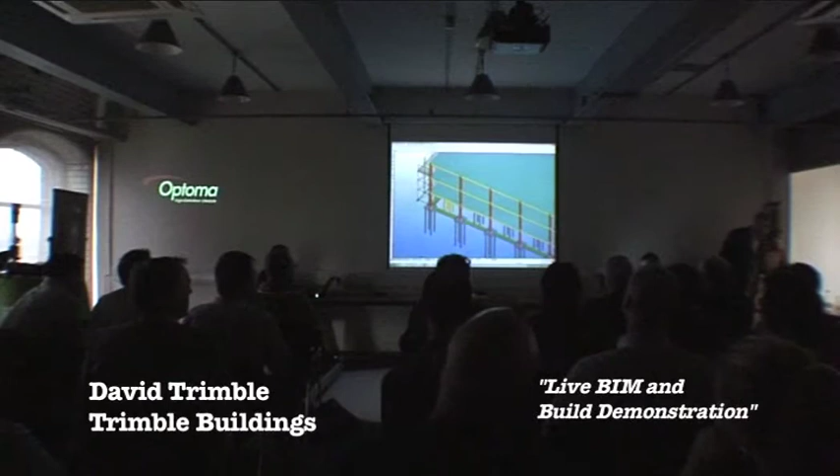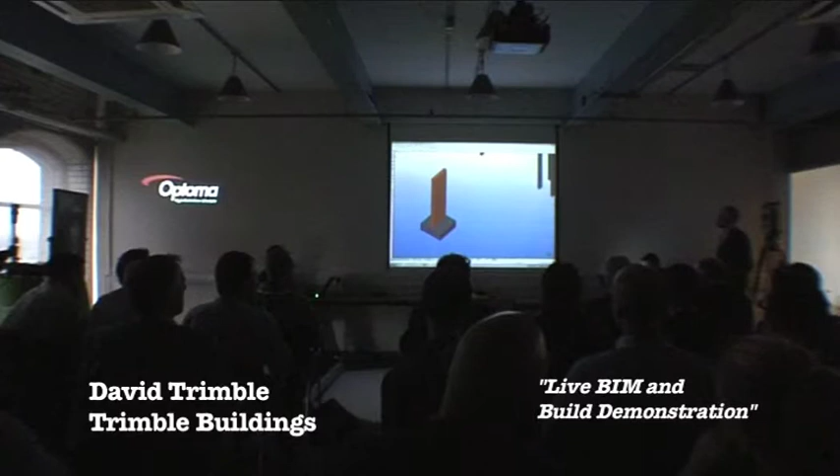Just to show you how easy it is to actually sit there and do some of these things, I'm going to insert a pad foundation, so there you go, pick a point, there's the pad foundation. I'm going to put a wall on top of there, so there you go, there's my first little wall I'm going to apply to that. What I've got is a whole suite of components in here whereby I can go through and do the reinforcement, steel connections, you name it, all in here with very complex detailed software. But what I've got here is the favourites I set up for today's presentation.

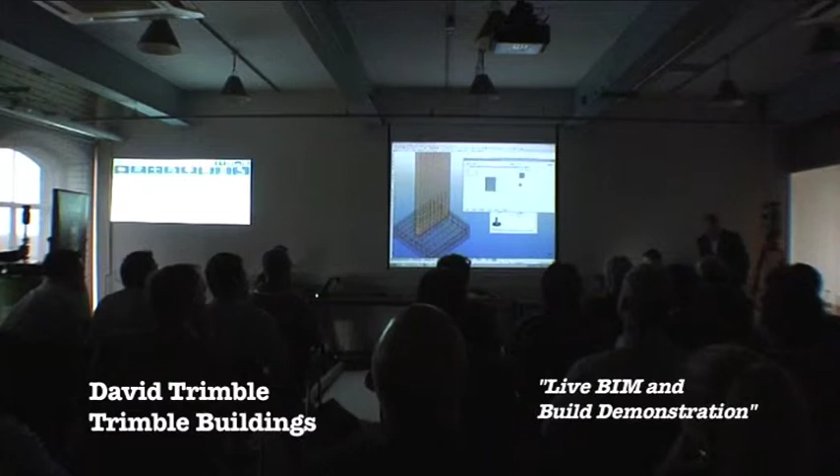So what I'll do is I'll just reinforce the pad footing, so pick the member there. I'll show you that, you'll see it's all reinforced. I'm going to put some starter bars in, so starter bars go between pad and column. I'll also reinforce this column. You can see very quickly, fill them all in there, and you can of course double click on these objects, change the reinforcement characteristics as you need them. And of course any changes come along, simply just come into here, say modify, you can drag these objects around, everything changes to suit. Very quick, very simple, very easy.

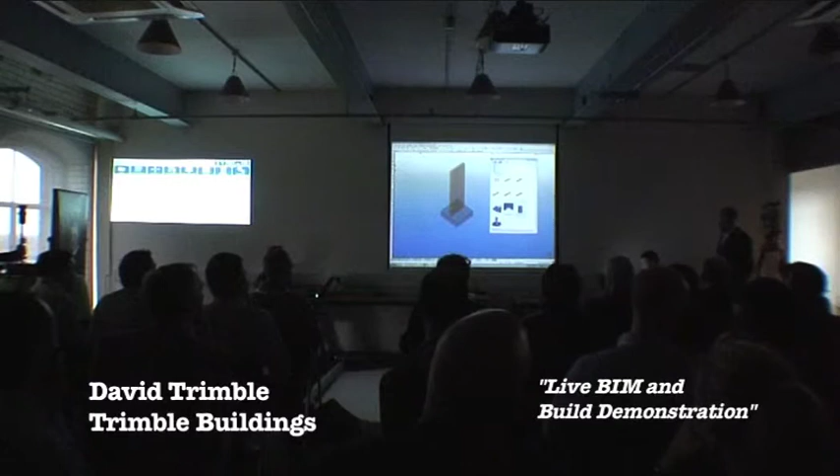What we can also do as well is come into here and maybe start to add in some embeds. So I just rotate this view around, and then I'm going to put in on this top corner, coming down here, for ease. There you go, I'll put an embed there. I can also put maybe a channel across the edge, starting over here, spanning from this edge across, perpendicular. There you go, so I've got some cast-in inserts in there that might have a core maybe.

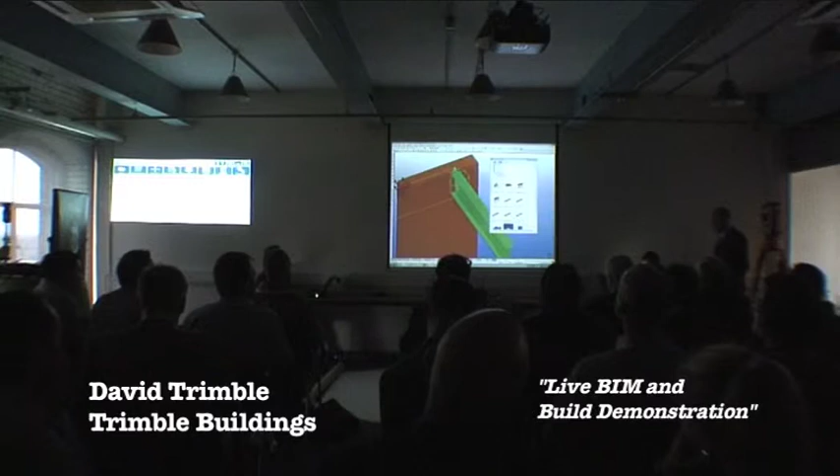What I can also do as well is I'll put a beam in. So let's put a beam in, say from here, coming out orthogonally. Let's put a cast-in plate on the end of there. And you'll see, highly detailed, all the bolts, all the reinforcements, everything required to sit there and make this structure. And it's all in there, can be clash checked and quantified and things like that.

And of course we can also go out and produce all the drawings as well. You'll see there's the reinforcement, the embed layouts, and of course the schedules that go with that. We're talking about passing things to site today, and of course passing things to the estimator.

What I can do is, onto this structure, I can start to insert some points to go out to the total station. So to insert a layout point, simply go around and choose the points that you want to set out. You can of course just pass out a model, but I want these physically to be sent. So you might want to set out your embeds, you might want to lay out this cast-in plate, or sensible points back to the site.

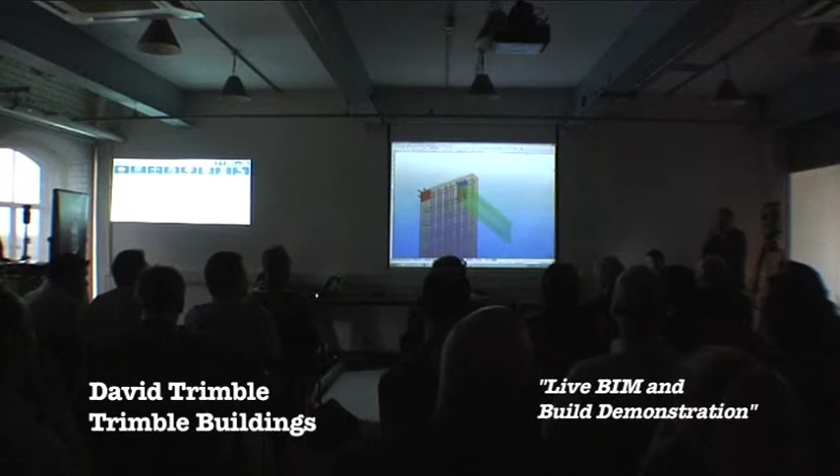And of course these can all be passed out to site using the layout manager. So here's the layout manager. What we've got over here, for the Blue Peter style, is effectively a representation of what you see down here on the floor. So these are the base points. Using the layout manager, I can export these points out to the total station, to the guys in the team, and I can also use the publish to Vico button to pass this model across to the estimators and the planners. At this point I'll just hand over.

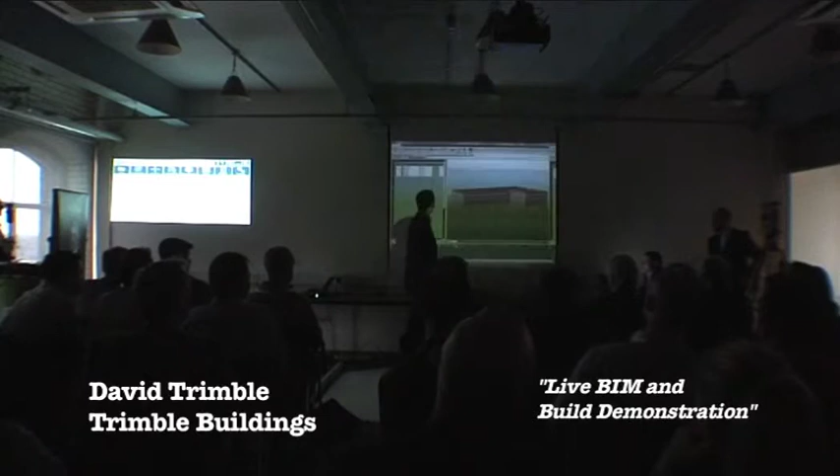Here we go. So this is Vico Office now, we're looking at rather than Tekla. I've got the model Steve just published out, which is again Blue Peter style, we just published it this morning. I've got one version in here, and these are the ones I've got active. I get a representation of it. It's actually Steve's model down here that I'm looking at, all those pile foundations and everything else.

We have multiple model formats in here. So the top one is SketchUp, I've got some Tekla in here, I've got some Revit in here, I've got some ArchiCAD. We are BIM neutral, we read from any source, any within reason anyway. That means that we can start to put together federated models from different sectors, different disciplines, and actually start to use them. Once we get the model into Vico, one of the things we can do is we can start to derive an automated quantity takeoff.

So on this screen, what I'm looking at here, still got the model up on the top right. This bottom left is what we call our takeoff manager, so it's a list of all the items that have been found in the model, grouped together by their type. If I select this set of pile caps down here, you'll see they're highlighted in the model. I can right click on this, and I can isolate those.

So I'm just looking at them, and if I look at the quantities that are derived automatically underneath here, I can actually pick the net bottom surface area. If I zoom in, you'll see here it's highlighted in a pinky purple colour. This gives me really powerful traceability. I can see where the numbers are coming from. I can see if something's been mis-quantified and painted in an extra area. It'll then recalculate the measurement.

On the left-hand side, I have my structured cost data. This is following NRM1. It's nested like a 3D spreadsheet. If I just nip that up one level, what you'll see is something probably a bit more sensible. There we go. Nip it up a level, we can see, and we can start to talk about these are the pile foundations, these are the in-situ reinforced concrete pile caps. I'm going to ask you guys to remember a number for me now: 52.7 metres cube of pile cap in this job right now, as it stands today.

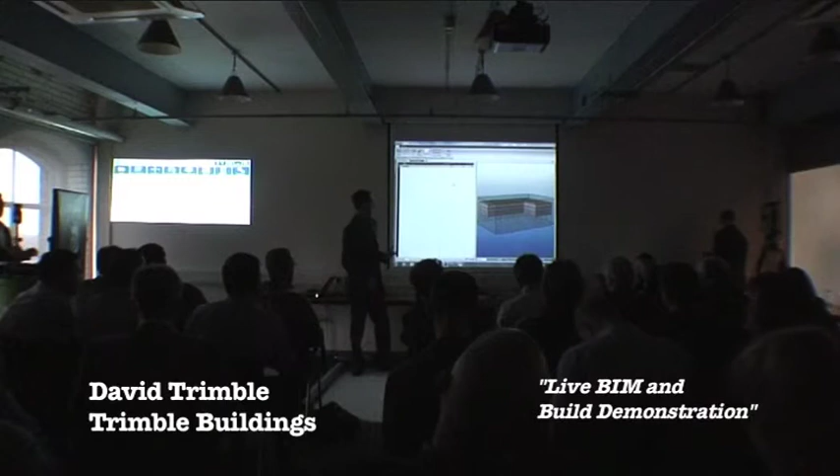The next thing we did inside Vico Office, we start to look at the actual planning of things. We are a location-based planning system. How am I going to deliver this job in a series of zones and phases, and how are we going to manage the assets in there? We've broken this little project up by a series of levels, and then I've broken each level up into a series of zones. It's this little foundation zone D that we're going to focus on in a minute, the planning side of things.

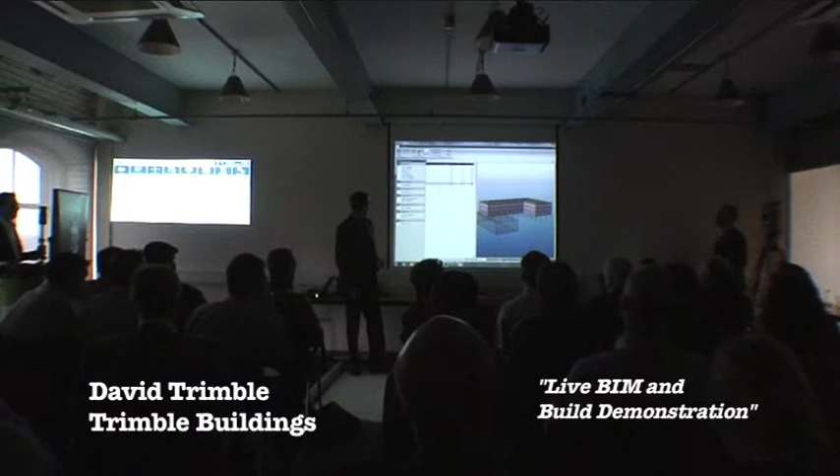We actually integrate between the costs and the program. It's a big feature of Vico Office, so I have a linked cost, linked program that makes it a hell of a lot easier to do things like earned value analysis. We drag cost line items from this side across underneath activities.

So if we look at setting out the ground beams under here, you'll see it contains some quantities and the labour and resource that's driving it. That's all been costed on the right hand side. So we're actually pretty tied in, pretty solid together here.

What that then gives me, we can do Gantt chart views, although we have a line of balance flow line, is what we call it, type analysis. The one I want to look at in here is the reinforcement of those pile caps. It's currently taking 2.4 days, so it's really, really accurate. It's been quantified from the model at a specific production rate.

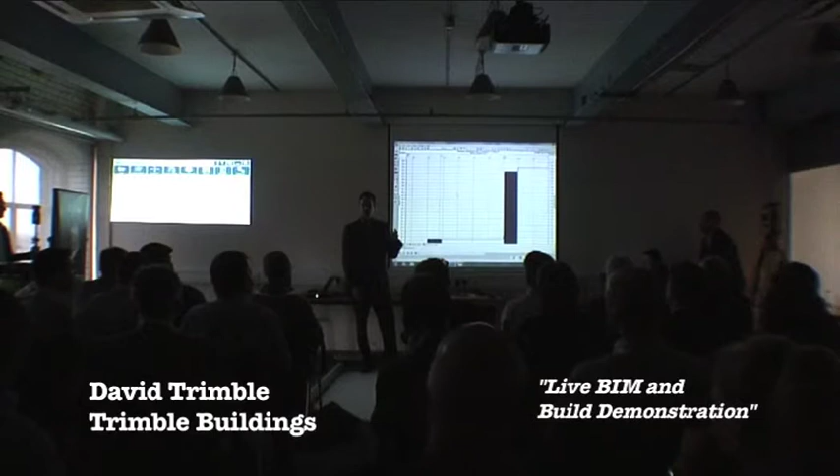Other things I can do in here, we brought resources in, so I get resource graphs. I brought materials in, so I've got material histograms linked to time. I can do cash flow, I've got network diagrams, I can go Monte Carlo risk analysis. We can even start to do things like schedule task control charts. So this is a particular location, what activity to do, when to start and finish, and I can put actual data in here and forecast. Extremely powerful piece of scheduling system.

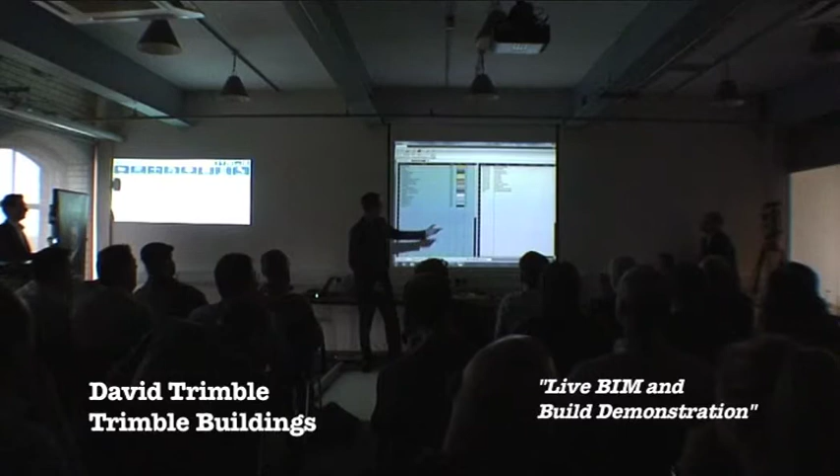And what the output from that is, very quickly, is we can actually define a 4D simulation, which is the pretty bit. We drag the activities into colour codes. It's very quick, it's very simple, but when I do it, it knows the model elements in a location, it knows when it starts, when it finishes, the duration, the resources, the cost, all that kind of information, which enables me to throw out something that looks very quickly.

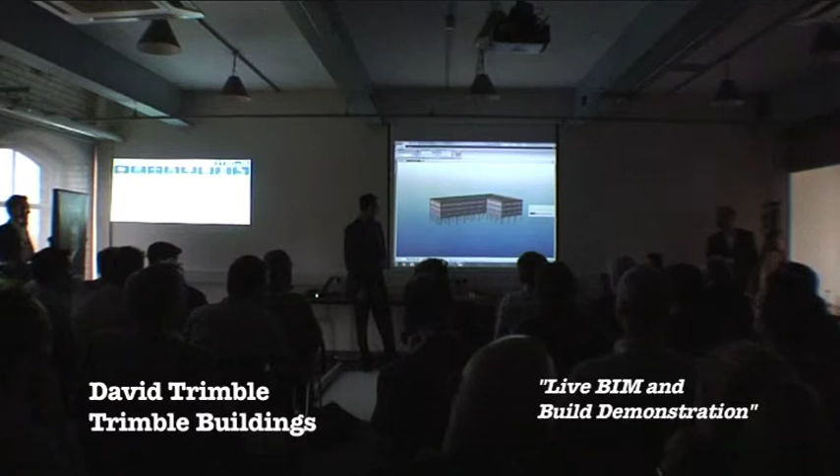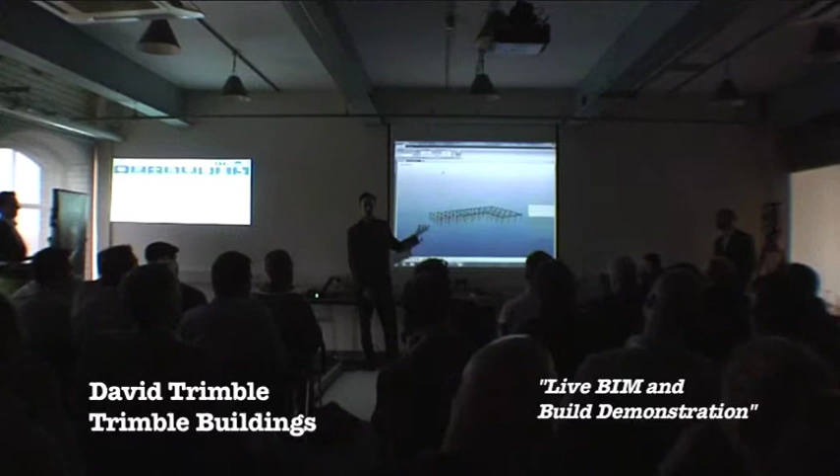I won't run all the way through it based upon our time constraint today, but we get a nice colour-coded model, and this is following the sequence phasing that we have across the job. It's a little bit easy to see on the pile caps, you get some nice colours, and this will build through the whole building. We can do demolition, we can do temporary works and stuff in here as well.

So again, a bit pretty, but we're also using it to do things like health and safety management on the site. I'm going to stop that there, and I'm going to hand over to these guys from the site and instrument side of things, and they're going to talk to you about the setting out.

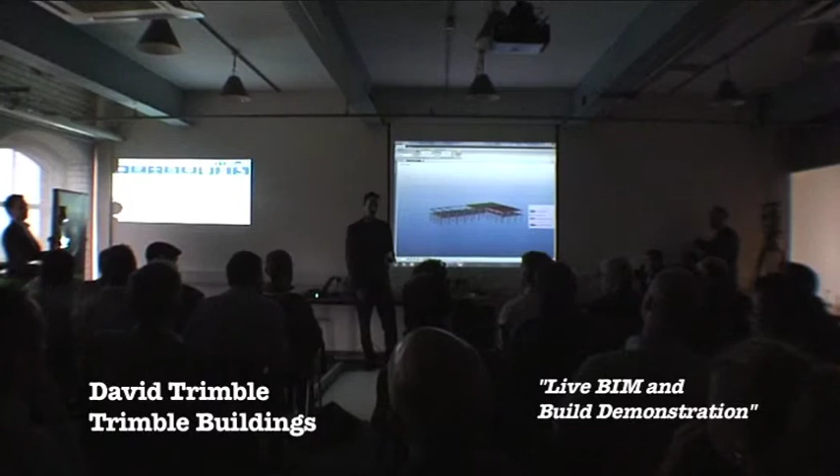So obviously we can do clash detection here as well, and like the Tekla guys can, we can output the coordinates too. So Ian and Mark, I believe, last one.

Okay, very nice. So what we have here is a robotic total station, so it's a one-man operated total station. Steve's created a 3D model in Tekla. That full 3D model is going to be placed, as you can see in the tablet here, running Trimble Field Link. So this is taken into the field for doing setting out.

So the full model taken in 3D. So it's all well and good having all this design data in 3D, but if you can't set out 3D in the field, what's the point? So this will take the full 3D model in, fully layered.

The robotic total station locks on here, so if I move the prism around, you can see it follows me around the field. Okay, so one man, very, very accurate way, always locked onto the centre of the prism, getting millimetre precision accuracies. So what we're going to do here today is we've got a pile cap.

You can see in the floor here, the guys in the back probably can't see this, we've got a bit of carpet rolled out here with a design on it, which we have from Steve. So I'm going to go back and set out the first pile location, which is point number 110. So I'll hand over to Ian, who will guide me to the point.

Okay, so on this tablet, this would normally actually be sitting on that pole, so it would be a one-man operation. But for this exercise, so that you can all see it, I'm actually projecting it from here, and I'm actually using a radio link to communicate. So I'm going to go to layout and tell Mark to go and set out point 110.

Now immediately, in real time, you can see where on the model you are on site. So as Mark moves it around, in real time, you get the bullseye position, and as we come within the tolerance, the bullseye will go green.

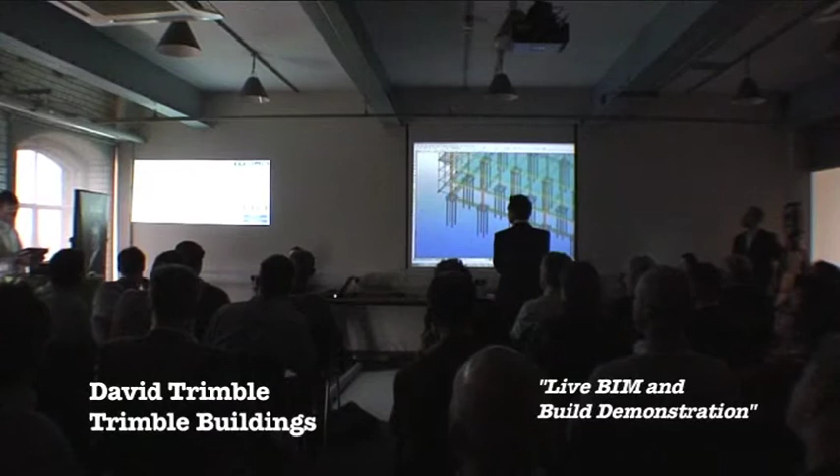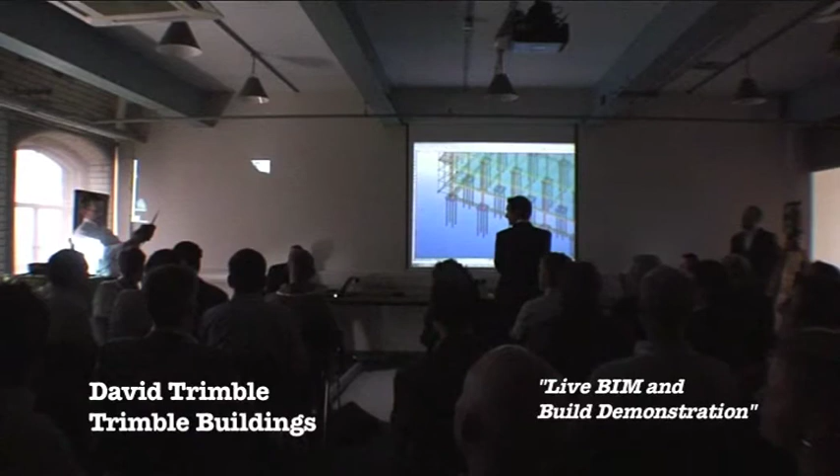At the same time with the tablet, we can also take a photograph. So if we can see the video now moving - in theory, if I was on the construction site... that's, yeah sorry, I can take the photo. There we go, so I've actually taken the photograph. Now, in theory, what I would do is create the PDF file, and that would be wirelessly sent back to Steve, who would then be able to access that information and carry on with the redesign.

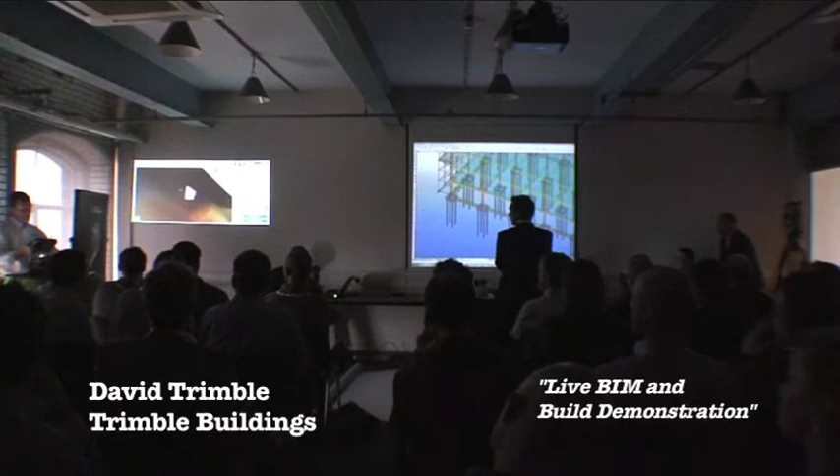So if I can hand over to Steve, we can then take it further. Okay, so I've received that information from site now, and again, using the layout manager, I simply just read that file and generate those points within my model.

So there's my new points down here, see the new drain, it's all been laid out with information about these points, but down there you can see them. And of course, based on that information, what I can do is start to actually make the changes.

So what I'll do is, click - very short on time - if I just double click on this model here, I'll just change these phases around. You'll see there is my new pipe that's being created. Yeah, so there's the problem.

I need to address this. Something needs to be done to fix what's going on site. There's a million ways you could be doing this, but for the purposes of today, what we'll do is simply say, okay, we'll move you from that location in this direction. Yeah, we'll go 2 meters that way.

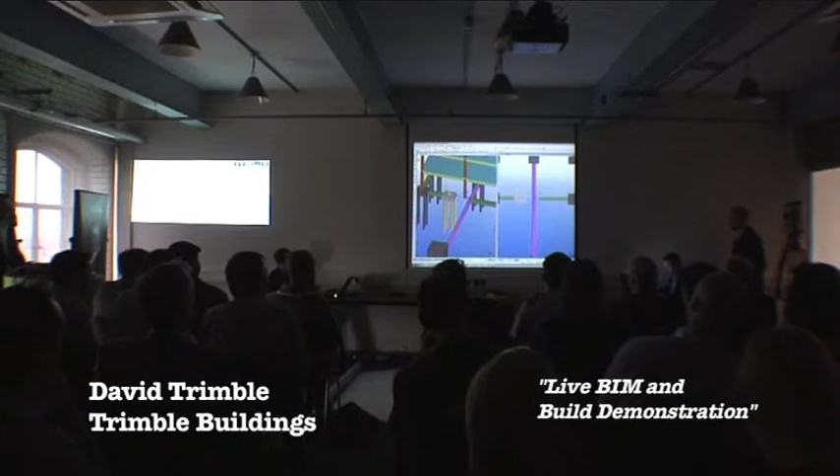And what we'll do then is take the same pile, copy it back across, put in, copy it 4 meters this way. What I'll do is just shorten this member down - the handles there, just drag it across to shorten it, and of course you'll see everything's being changed and updated.

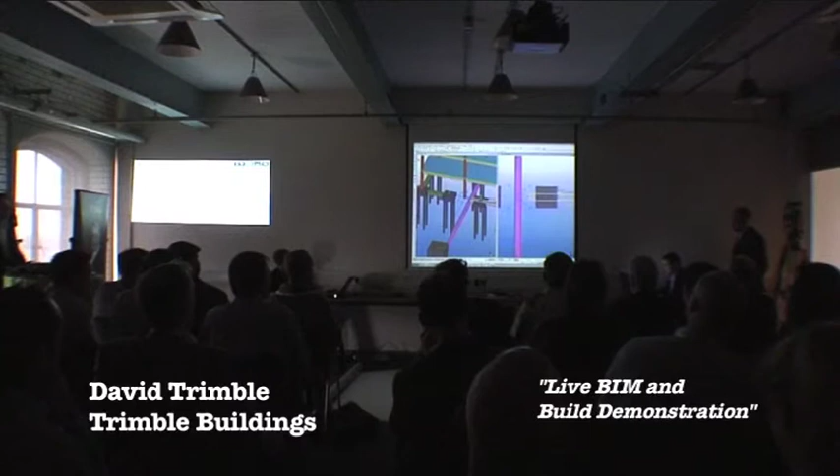And what I'll do is insert myself a new footing in there, so just take those settings. I'm going to want a new one from this location across. Okay, redraw that view there, redraw this view. So you'll see there, I've addressed the situation.

Of course, there's a lot more work to be done. We need to actually work out what we're going to do with this column, what we're going to do with these starter bars and things. But of course, you can see I very quickly made the change.

Just put some points on there. Likewise on this side. There we go. So very quickly put those points in there.

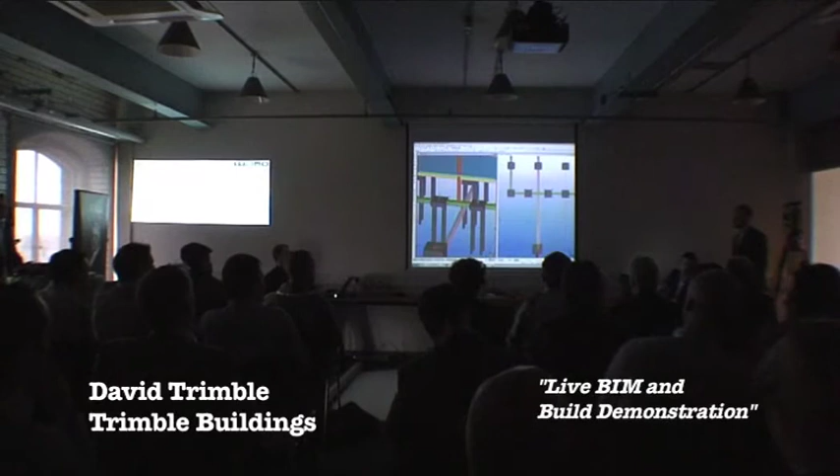That information can then again be sent out to the guys on site so they can continue working. I can of course pull this information to the rest of the actual design team, and pass the information to the estimator, the contractor, the planners, to see the impact of change for the planners.